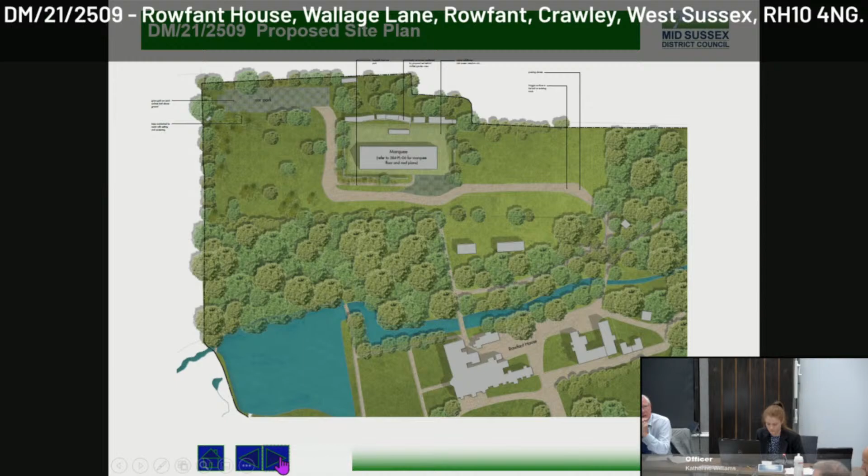The information submitted with the application indicates that the proposed structure of the marquee would include acoustic lining.

The council's environmental health officer has commented on the application, and their comments are in full on pages 63 to 67. They note that during the majority of the time, the music for the proposal would be barely audible or even inaudible. But when the background noise decreases between 8 p.m. and 9 p.m, they consider that the music level is likely to be audible at low levels from the gardens, however unlikely audible from the house.

They note that there would be some level of disturbance from the proposal, given that it's within the countryside. However, they consider this to be low. They've recommended conditions regarding noise management plan, lighting, construction and hours of delivery, and it's also recommended that in association with these conditions, there should be other conditions restricting the hours of use between 11 a.m. and 11 p.m. and the number of events to 30 per calendar year.

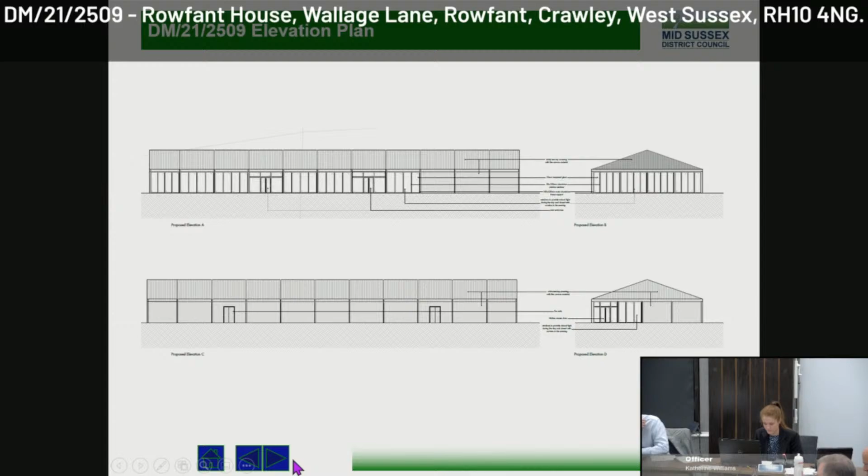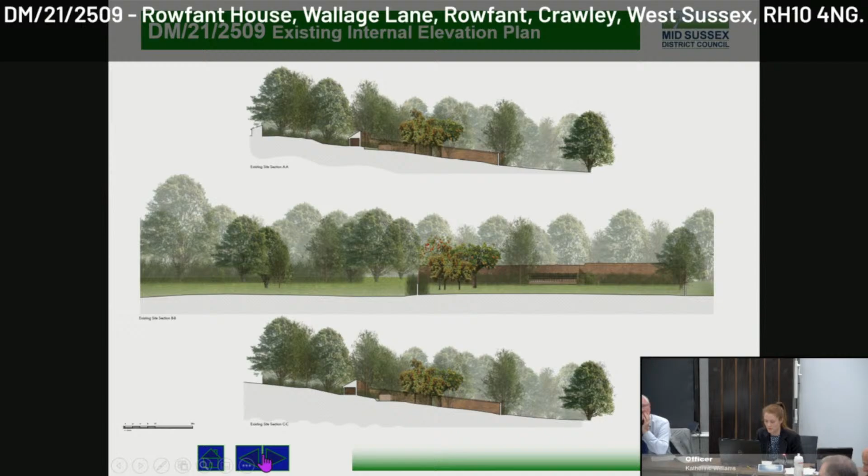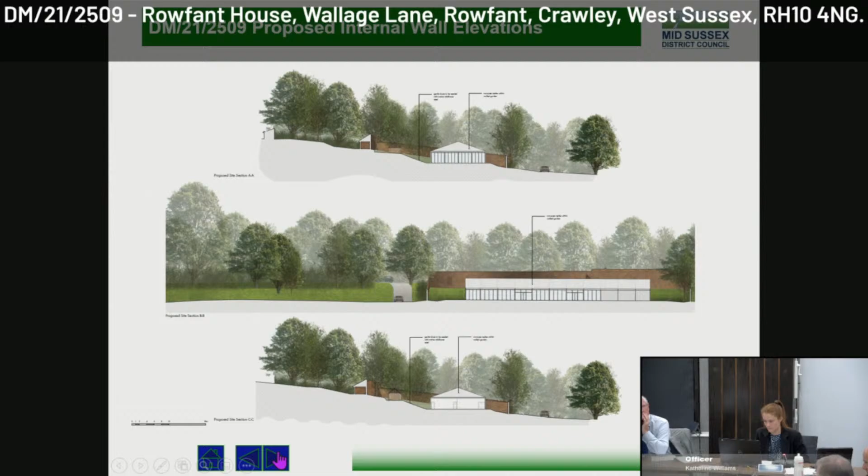These are proposed section plans, including the marquee and the walls of the garden, showing the Bothy buildings to the north, and indicating that the marquee wouldn't be visible above this, but would be visible from the roof form from the two sides, and would be visible from the southern side.

The officer has also recommended structural surveys and detailed repairs and landscaping conditions.

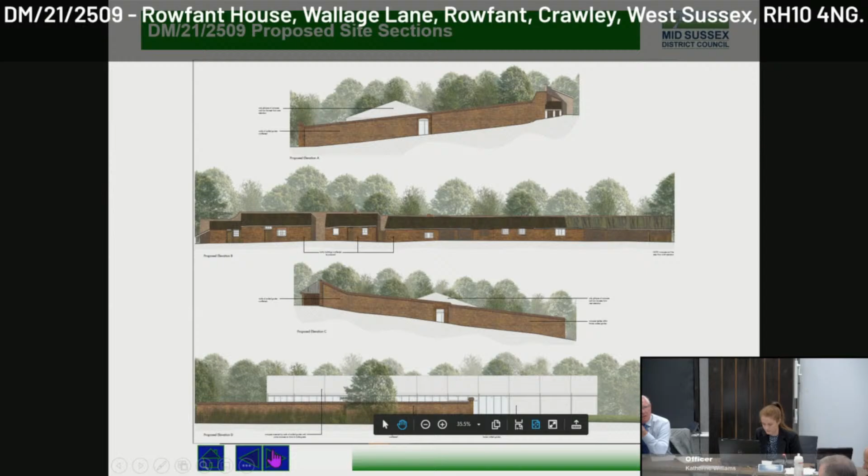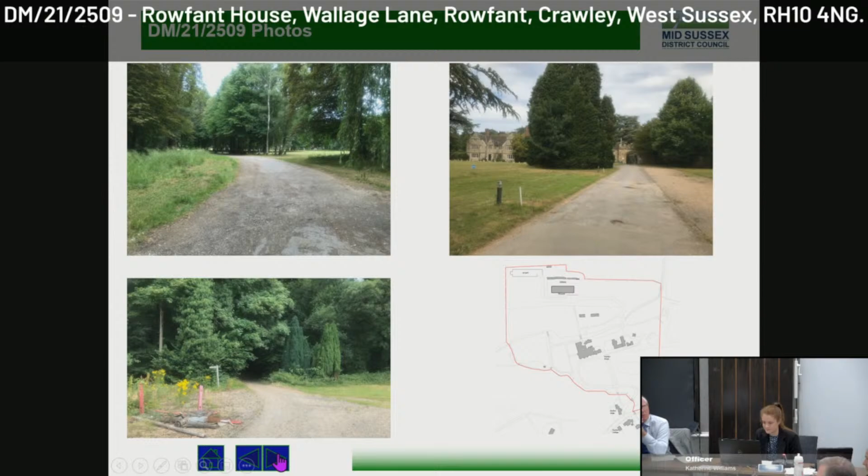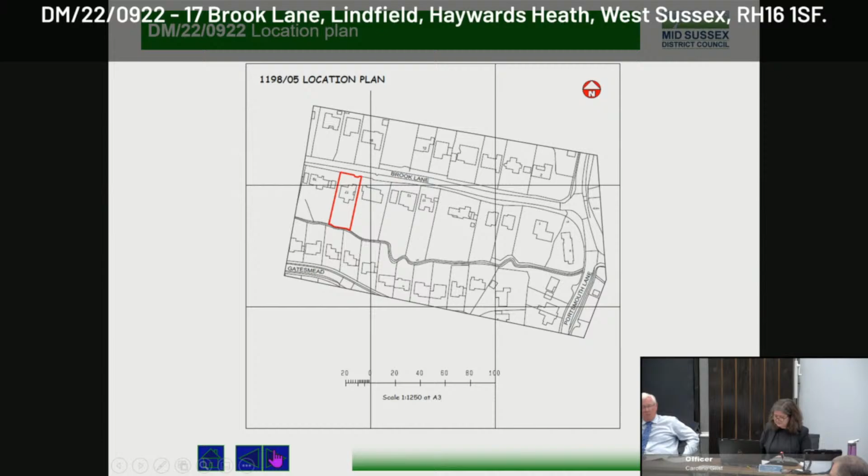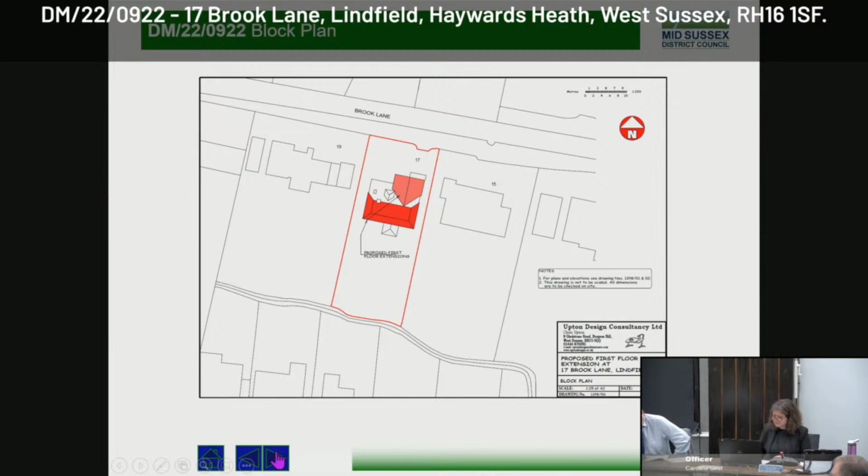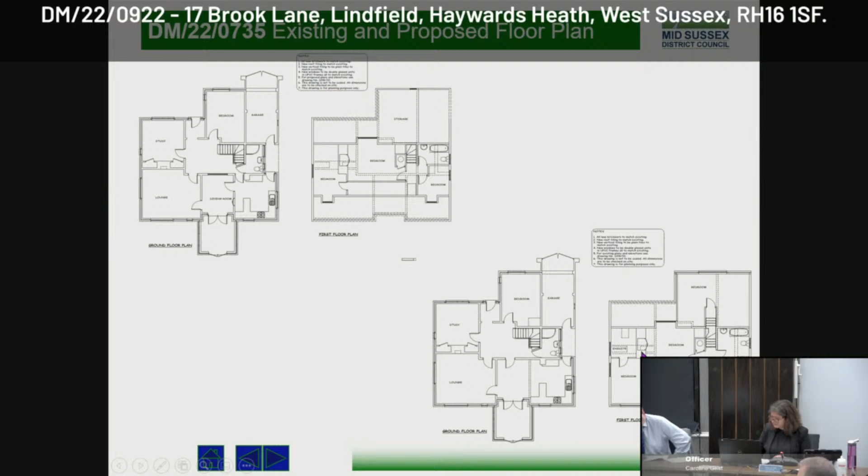The next slide shows the floor plans, and the works are to take place on the first floor. To the front, the increase in roof height would allow an existing storage area to become a bedroom, whilst to the rear, 2 existing bedrooms would be altered, one of which would gain an ensuite, and a further bedroom is to be created in this space here.

This slide shows the existing and proposed front elevations. As you can see, the proposal would increase the eaves from where they currently are, as well as the ridge, and would change the window design as well. The dwelling is considered to be a characterful chalet bungalow that is of a simple design and has remained relatively unaltered. It therefore contains the features of a chalet bungalow, such as low eaves height and first floor accommodation gained through dormer windows.

These are considered to be characteristics of the dwelling. In terms of design, further to the design policies within the district plan, Mid-Sussex District Council also has a supplementary planning document, the Design Guide, which is a material consideration for applications and is there to inform good design. In terms of extensions, it recommends that they should respond to the design of the dwelling, be well integrated in terms of scale, form and massing, and allow the original building to remain the dominant element of the property. It is considered that the increase in roof heights, as shown here, and the detailed design would not be in keeping with the character or proportions of the existing dwelling. It is also considered that the projection would appear as a more dominant feature.

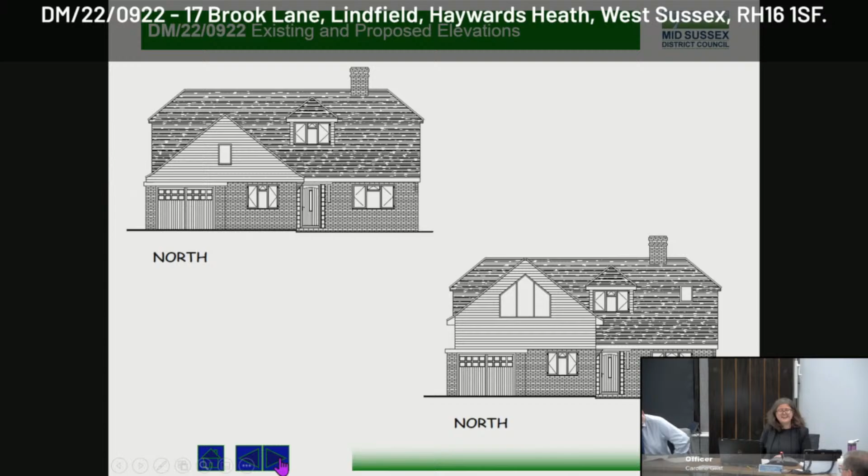Speak up a little bit louder. These are the existing and proposed rear elevations. Again, you can see the existing property has low eaves and 2 small dormer windows to the rear. The proposal would lift the eaves of the house significantly in order to create the first floor accommodation. Due to this change, the works are considered to be contrary to the character of the existing chalet bungalow, as it would result in a fully expressed 2-storey rear elevation being created.

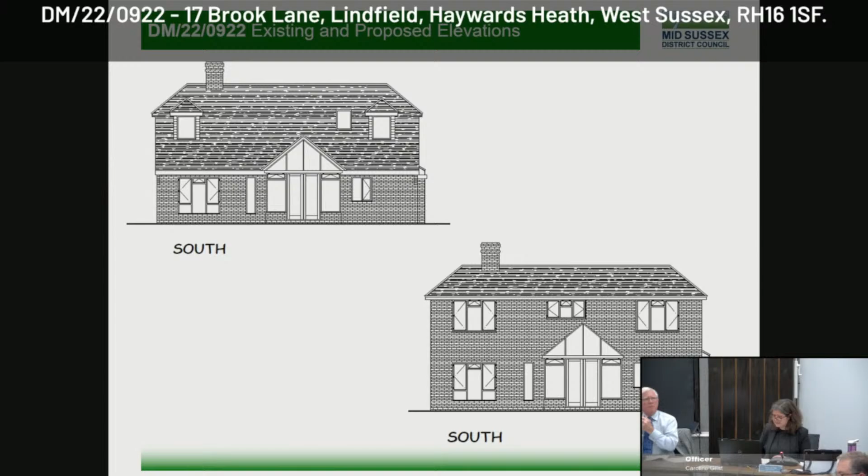These are the existing and proposed side elevations. Again, the works to the rear can be seen as proposed here.

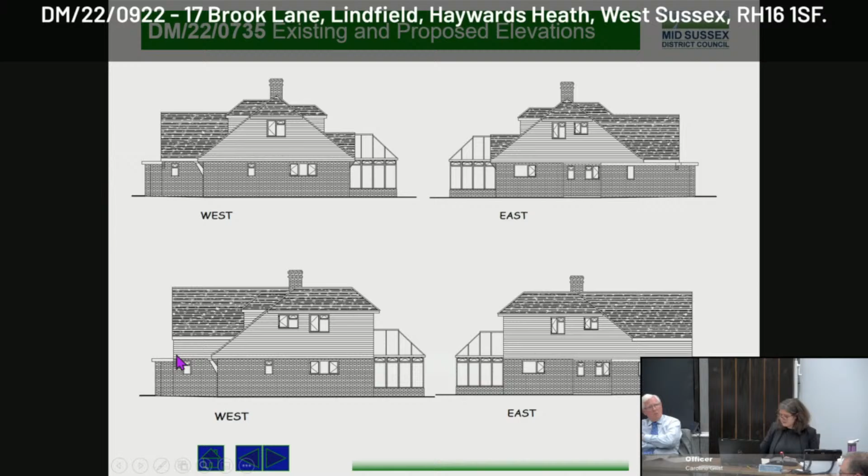This slide shows the existing and proposed roof plan. In order to create the rear extension, an expanse of flat roof would need to be created in order to create the volume. This is not considered to form part of a subservient addition.

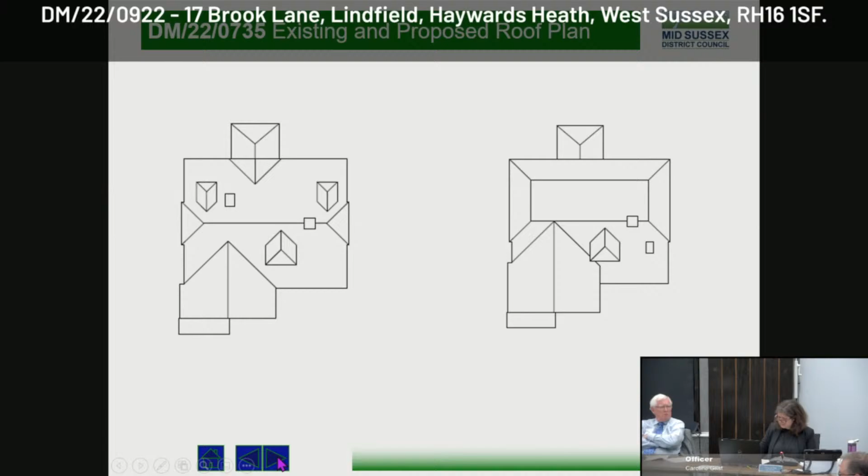This slide shows the varying properties that are located around the application site. They are all set back within their plots, however, are of a traditional form, have traditional materials and are well spaced.

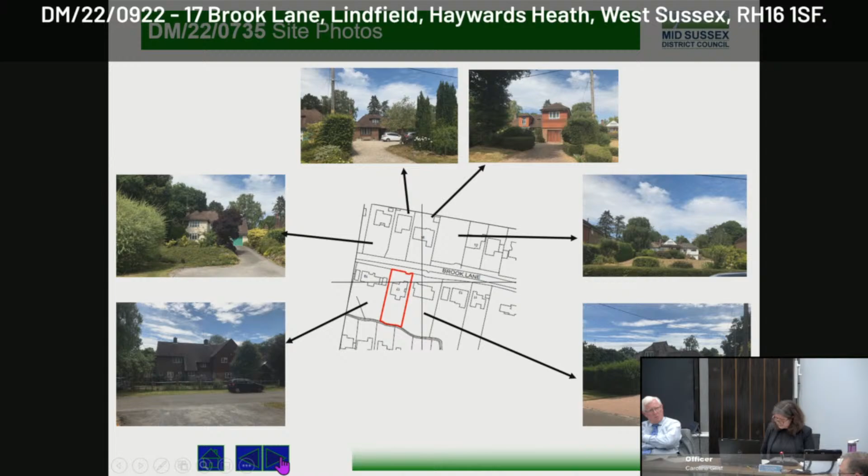These last photographs illustrate, again, that the houses are set back and are well spaced, and it's considered that this spacing would allow views to the side of the application property, and therefore the works to the rear would also be visible in the street scene.

So overall, it is concluded that the design of the proposed development would be harmful in terms of the impact on the existing property and the street scene, and the recommendation, therefore, before you is for refusal.